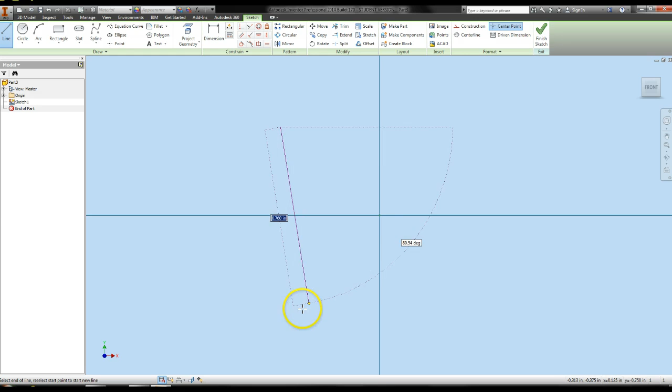So I'm going to go ahead and create my lines, kind of go down, goes over, and it goes back up, over there, down, up, over here, and then we'll kind of connect that. I'm going to collinear constraint that, and that's actually going to be kind of a pain, so I'm going to delete that small line and then extend that line. I'm going to go ahead and press escape.

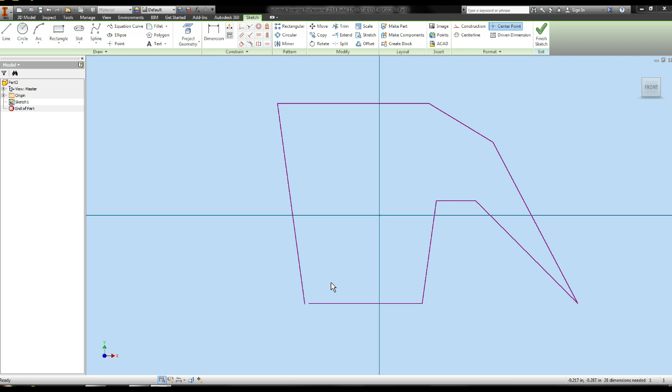So this is kind of the general shape we're going to start with, and I'm going to go ahead and dimension this how I see fit, and then come back and show you that, since that's not really something I think you need to watch me do.

Alright, so now I've gone ahead and dimensioned this. If you want to pause the video and look at the dimensions and match those, you can do that, or if you just want to eyeball them and figure them out yourself, that's fine as well. So you can see this general shape we have compared to what this hammer looks like, and that seems about fine to me, and I think will at least work for the sake of this video.

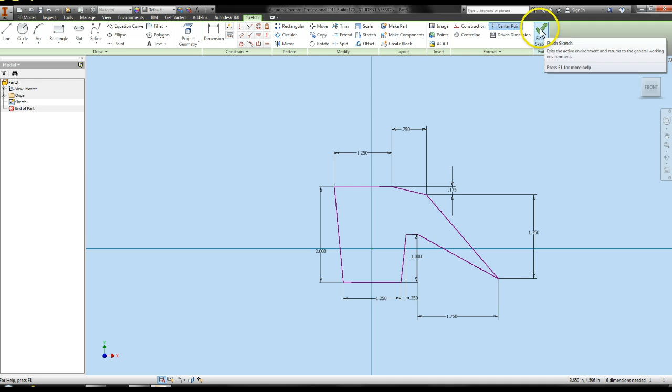So I'm going to finish my sketch, and as you see, you kind of go back to this main screen. We're going to extrude this out, select this, and extrude that symmetrically. An inch seems good to me. We'll just use an inch.

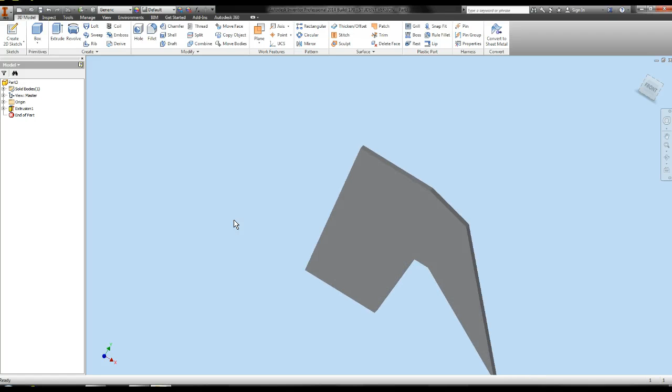Again, I'm just showing you the general shapes for this video, not exactly how to make a real life hammer, I guess, and I don't have those dimensions with me.

So first what I'm going to take care of is making this more of kind of the arc you see in the video, giving it this kind of round edge. I'm going to do that by using this fillet option in the modify, and I'm going to select that corner there, and you can either drag or type in a value.

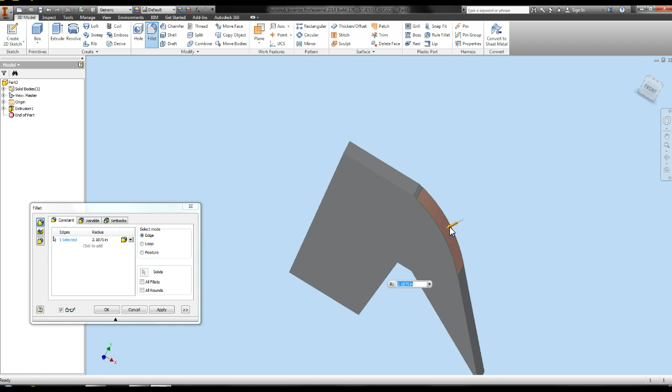I'm kind of going to drag it until it gets close, and then look at what that number is close to. I'm going to make that 2.2, just give it a nice number, and then I'm going to go ahead and fillet the top so that it all rounds together. As you can see, that looks really nice.

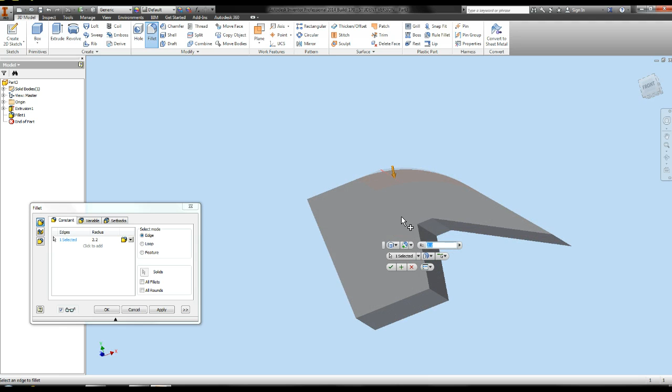I'm also going to fillet this bottom here, but I'm going to see if I can drag it. So I'm going to make it 3 actually, and see how that looks compared. So that's okay. This part's a little thick in here, but I'm going to be okay with that.

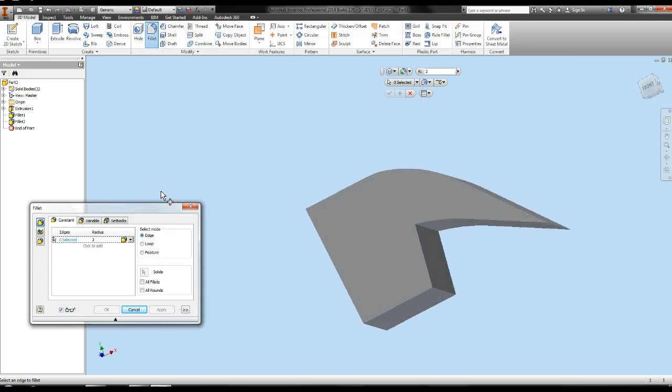So that looks pretty good, and then I also want to fillet this inner part here so that it has that smooth transition. So I'm going to select fillet and rotate this around so I can get a good view. Left click there, but I don't want it nearly as much. I'm going to make it maybe 0.25 - that's even a little bit much. So I'm going to make it 0.125, just really small, as you can see, just to give it that nice edge.

So we're making good progress. We already have a nice kind of hammer shape. And now what I'm going to do is create a plane kind of offset from this edge here with a little circle so that this comes in, and then I'm going to make another plane offset to go back out and then extrude a circle out from there.

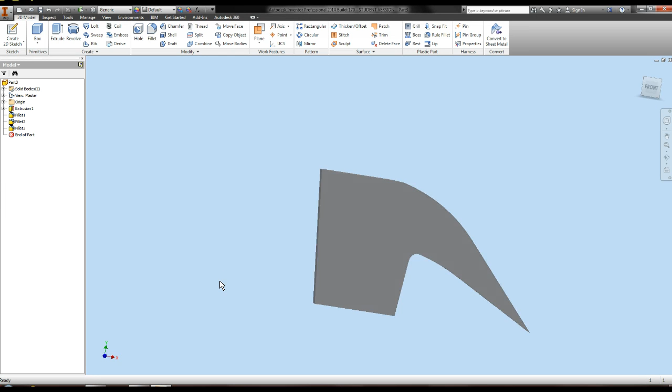So to make a plane, you want to be out of the sketch option, and then as you can see it says work features. You can left click plane and you have all these different options, but I'm going to say offset from plane, and you can select a face, and I'm going to look and see what I think we should use.

I'm going to say about an inch. I'm going to try that and see how that looks. It lets you preview before you enter. Let me look at that. Yeah, I guess that'll be okay. Maybe 0.75 - you can play around with these dimensions.

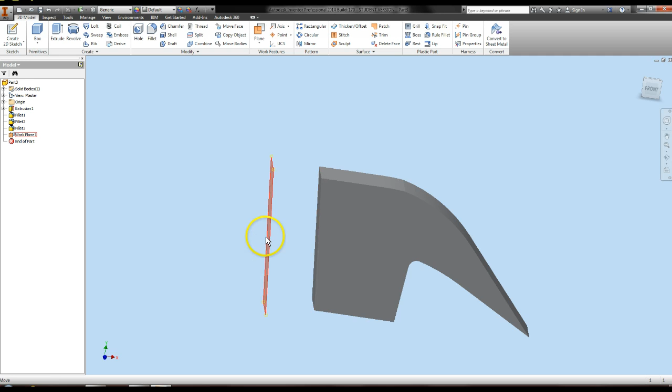Then we're going to create a circle on that plane. I'll rotate around so you can see the plane created. I'm going to select Create 2D Sketch, and you want to hover over the outer edges of the plane and select there, and make the circle more up here.

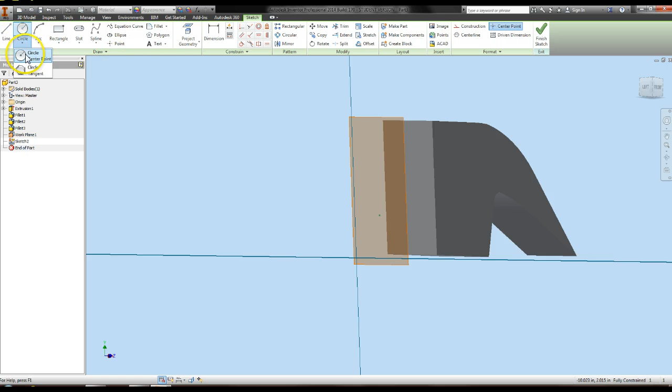I'm going to select Circle, Center Point, and create a circle arbitrarily. I kind of want it to be in line with the middle point. We're just going to create a circle of, say, 0.5 maybe - that seems a bit small. 0.75, so we're going to make that. That looks pretty good.

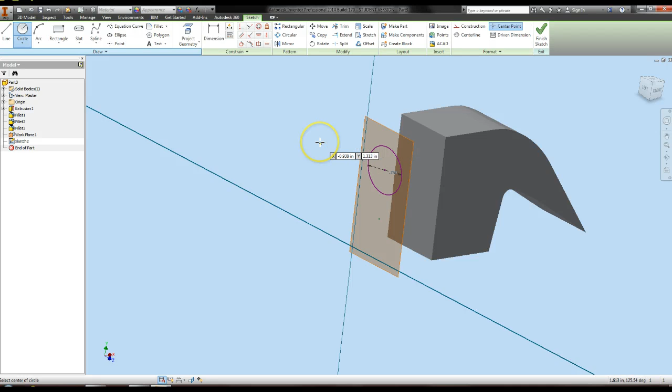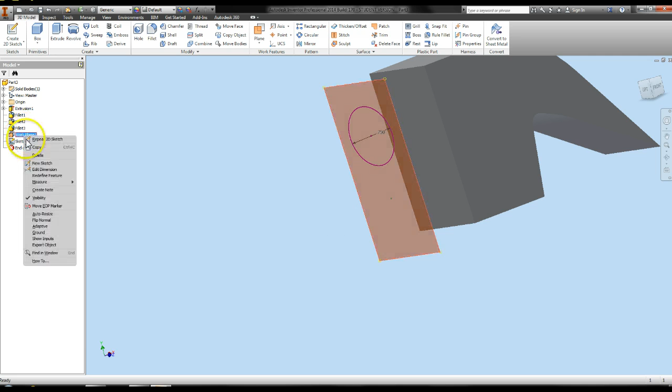Then we're going to create another plane because we want to loft these all at once so we get a smooth transition. So I'm going to finish that sketch. I'm going to get rid of the visibility of that work plane because it can be annoying - you go to your browser, right click, and then left click visibility.

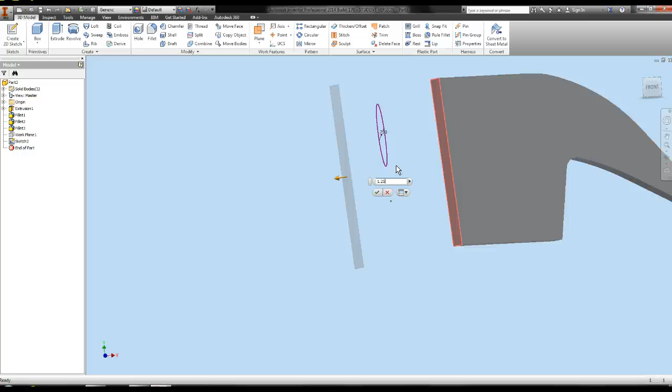Again, we're going to go to work features, create a plane offset from this, and we can just make it farther. We made the last one 0.75, so I'll make it 1.5 just to make it kind of even. That actually seems kind of far, 1.25 maybe. I don't know how symmetrical they seem, a little far, but we'll just make it 1.5 to make it even. It may be a little long, but that's okay.

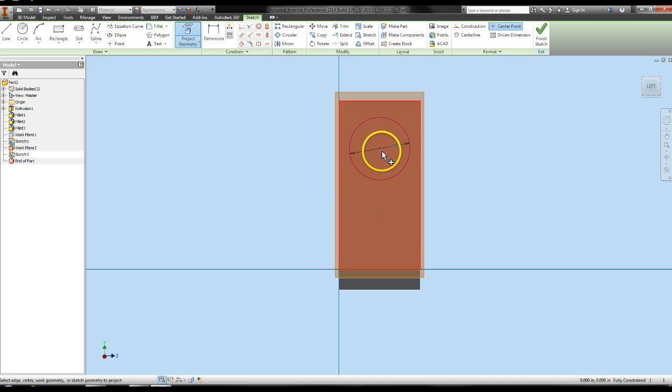Then I'm going to create a 2D sketch on that plane. I want the circle to have the same center point, so I'm going to exit out of the circle option, select project geometry, find this center point and left click there, press escape, select circle center point, hover over until I'm on top of that center point and drag out. I'm going to make this circle 1 inch, press enter, and then finish sketch.

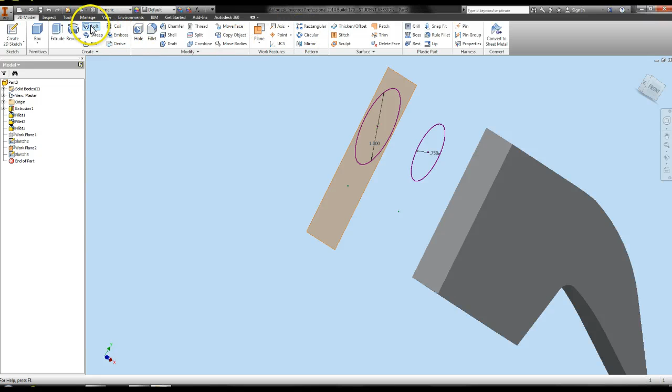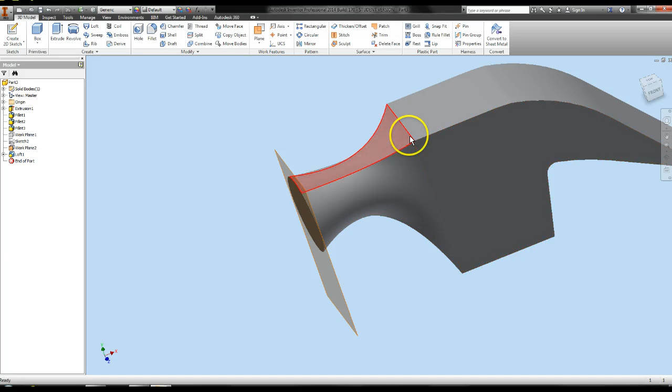As you can see, we have these lovely 2 circles. Now we're going to loft this. I'm going to select this face first - we want it to go into that circle, and then we'd like it to go into that circle. As you can see, that gives us a pretty good shape. I'm going to press OK. So we're really getting this nice hammer shape now. We're also probably going to want to fillet these edges here just because they look a little weird, but we can get back to that.

Now what I want to do is create this little hammering part by creating a circle again on that surface and extruding it. It also appears to me that these may not have been circles extruded, but instead maybe a 6-sided polygon or something. You can play around with that if you want that exact number of edges, but we're just going to use a circle for the sake of this video.

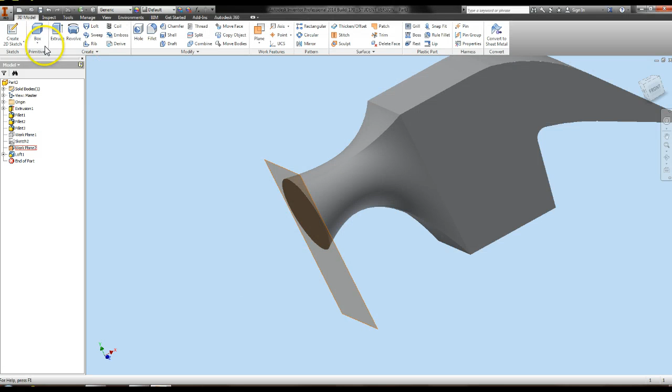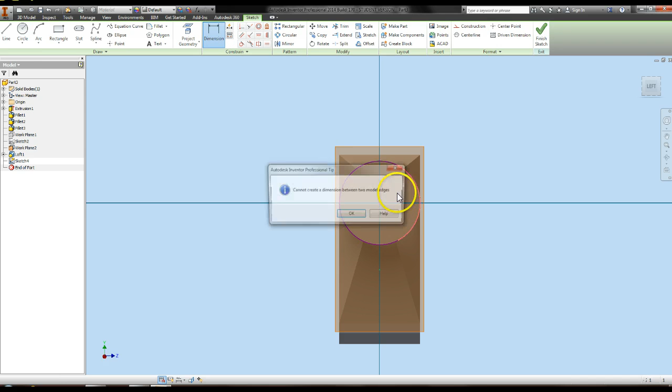We already have a plane created there, so we don't need to do that, but I'm going to select Create 2D Sketch and select that plane itself, then create a circle that matches the exact diameter, and dimension it so that it is constrained. Oh, I think it's trying to make it to this - there we go, it was trying to make it to the other. Okay, so it kind of knows where we want to have things.

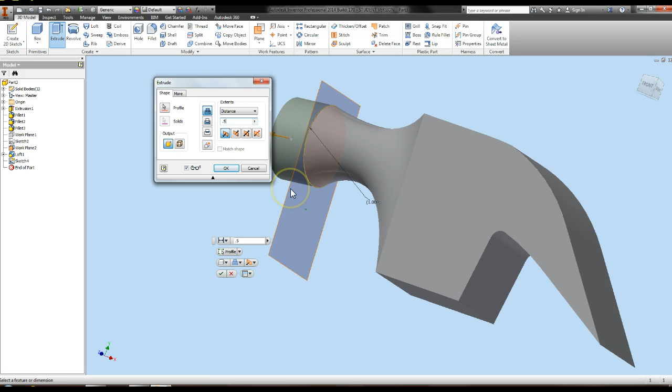So we're going to extrude that now. Obviously that's a little much, maybe we'll make it 0.5. Yeah, I guess that looks good. Yeah okay, so we're going to use 0.5 and just select OK. Again, I'm going to get rid of the visibility of that work plane so that it's a little easier to see.

So this is kind of the basics of how to make the head of this hammer. Again, there are a few other things you could do to make it look a little more realistic, but this is a basic shape, and this is going to be a pretty good way to start off.